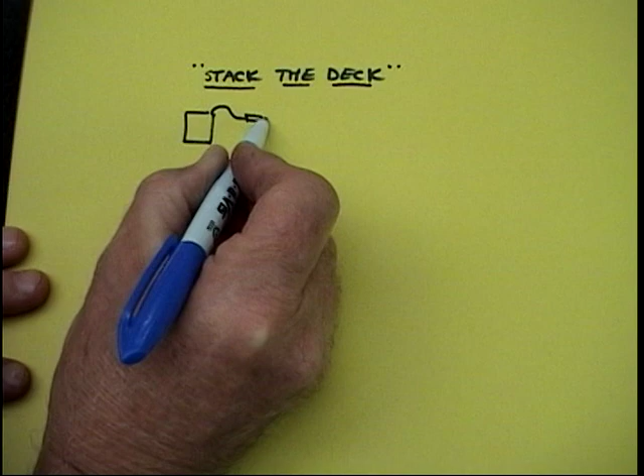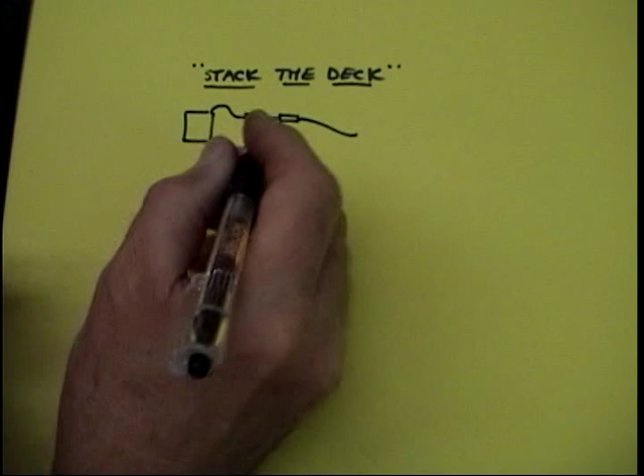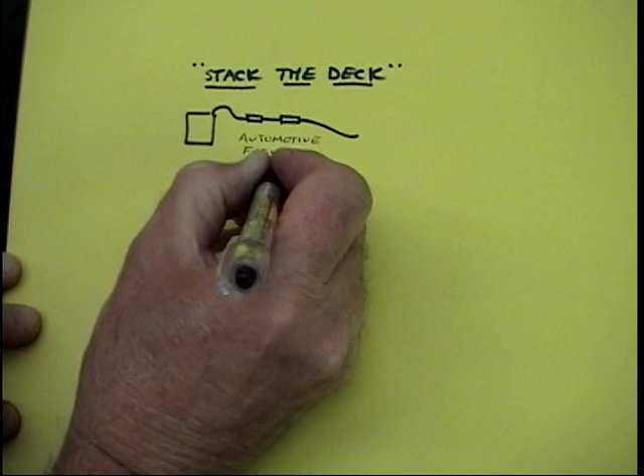Fuel jug. If you notice on my fuel, I have two filters, and they're not the kind of little filters that go in the airplane. They're automotive fuel filters. You could buy these in any car parts store and they're cheap.

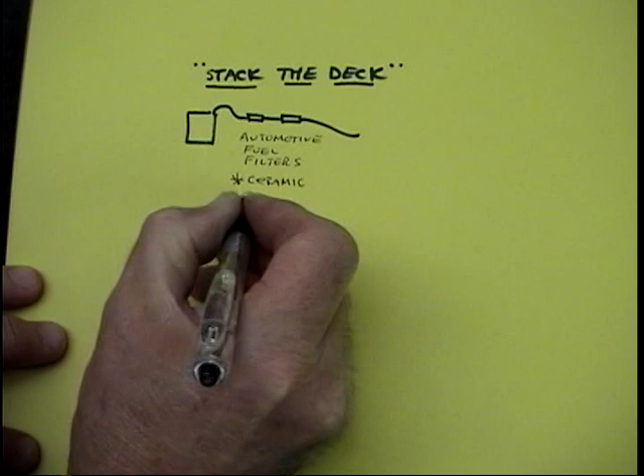The best ones are ceramic. They make them for motorcycles too. Paper ones also work. What these do is filter out a lot of the things that happen to fuel.

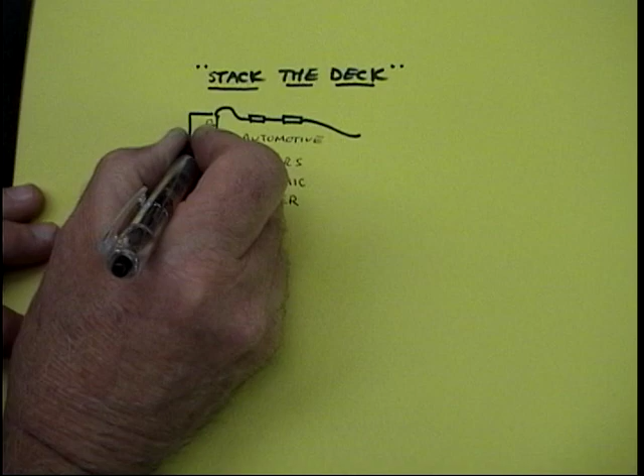When fuel gets a little old, the castor oil tends to congeal. Dirt and dust can get into the fuel, and because fuel is hydrous, it absorbs moisture. A lot of times it'll turn the castor oil into what looks like little white cotton. These filters get it out. So this stacks the deck in your favor before you ever even fly the plane. Having these little filters is a giant saving.

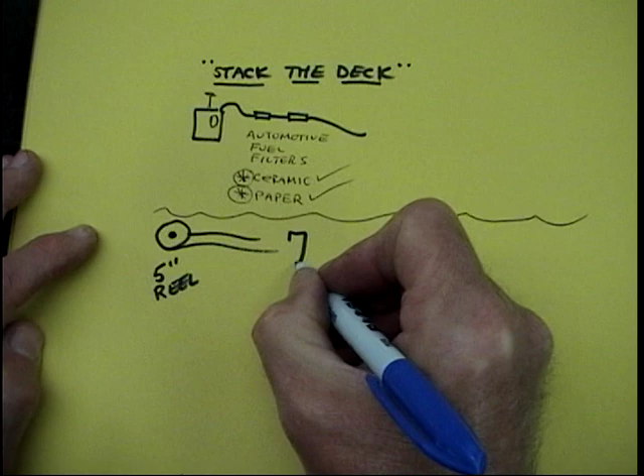Another little tip, worth its weight in gold. Every ship that I have has a line reel, and they're all 5-inch large diameter line reels. I also have a dedicated handle for each model. The handle is always marked with one side up, bright paint, and on the bottom side a safety thong.

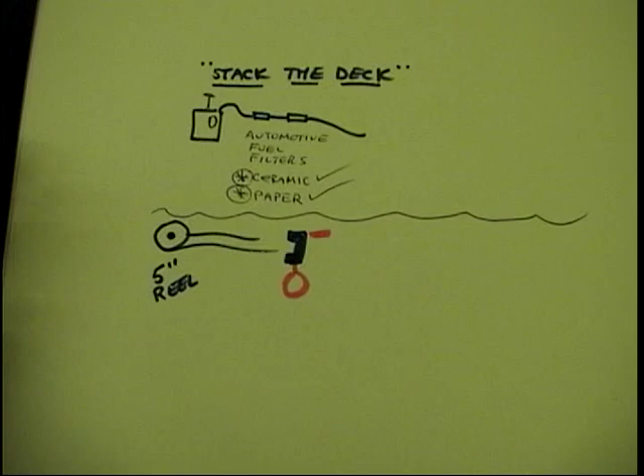You'd think nobody in the world would even think about doing it any other way, but you do have people with one set of lines and one handle for 10 different models. When I get to the point of bench trimming a plane, I want that set: the handle, the clips, the lines, all together. And that goes with that model. I don't mix and match.

There's so much of a chance that when you use little reels to store lines, the small reels that lines come on, you kink the ends, and that's where they usually break. When you have a handle that's going to go on model A, model B, model C, the chance of getting it wrong, picking it up upside down, hooking it up crooked, is astronomically higher than if you had one handle and lines for each model.

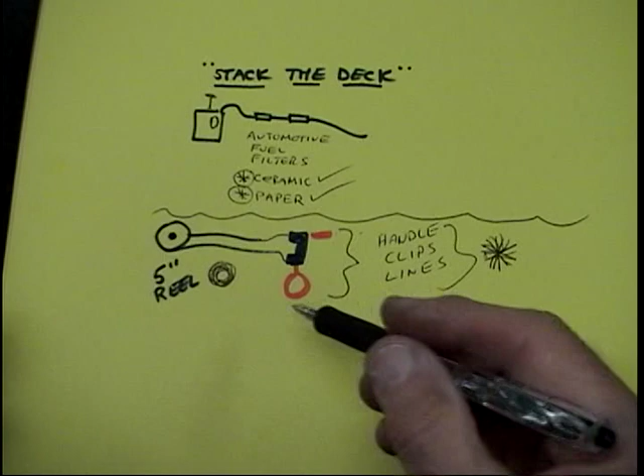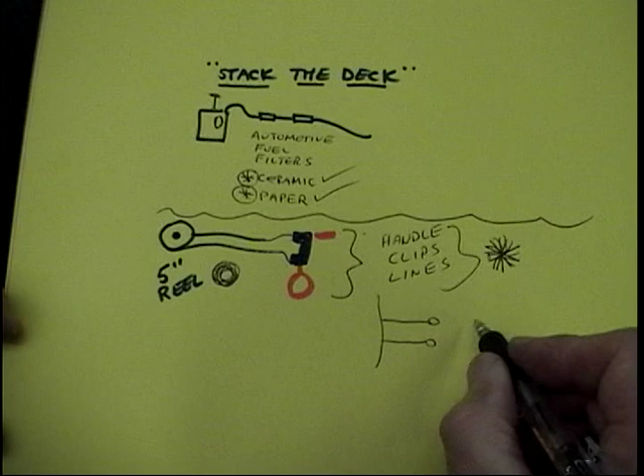And on the side that goes to the plane, if you look at any of my models, here's the lines coming out of the wing, and here's the lines going out to the handle. I'll always identify with a little piece of red wire which goes to which — in the case of some people, they use nail polish or some other identifying way — so they don't get hooked up backwards.

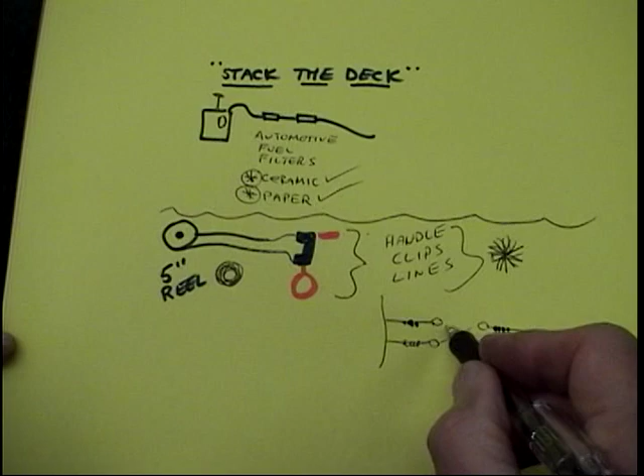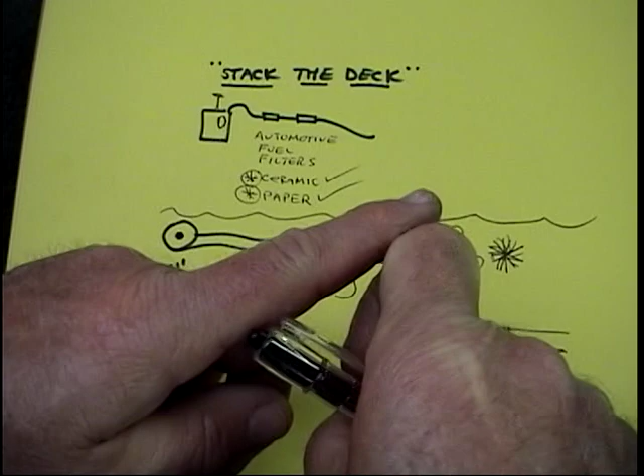Easiest thing in the world: you're flying that brand new model you worked all winter on, everybody's excited, all your friends are there, and what happens? You hook these up backwards, and it's usually a disaster. Or you've stored lines on those little baby reels, and right where they come in and out of the reel, you'll always see a kink. It's just sad when somebody loses a model unnecessarily that way.

Big line reels, the best insurance. A dedicated handle for each model.

Another part of bench trimming is called knurls. A lot of manufacturers, even of the most expensive and best engines made, don't knurl every surface. Here's the motor, and this is part of bench trimming you do at the shop before you fly the model. The back face, where the prop is going to go up against, I would take an engraving tool or a file and roughen it up, make it as rough as possible.

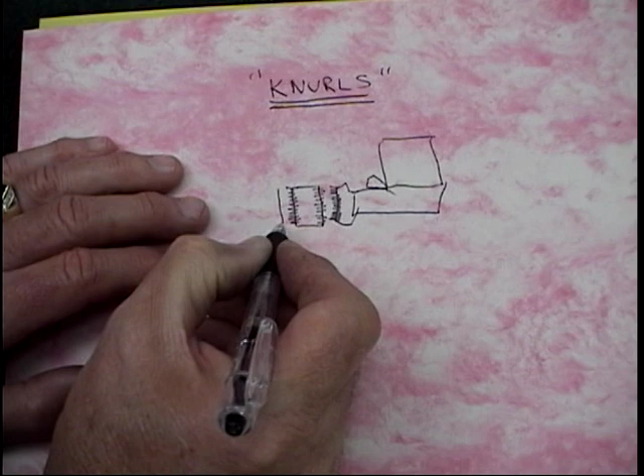The surface of the prop, especially if it's nylon or carbon, I want teeth there. I want it rough — an engraving tool is real good — on both sides. The washer or nose weight that goes up against that, I want knurls on that side too. The side the nut goes on, you don't need knurls. So you usually wind up with a minimum of 4 surfaces.

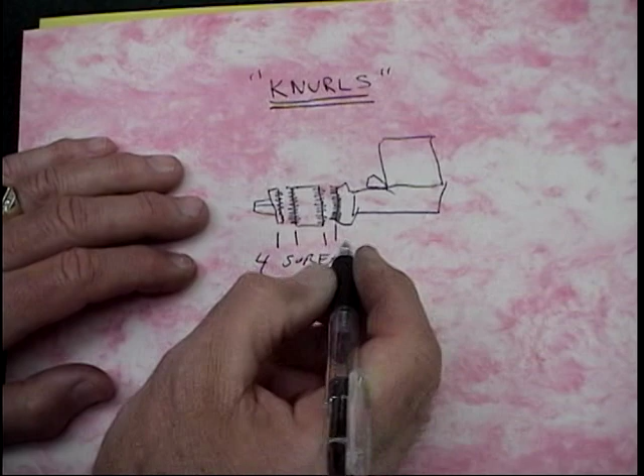In the case of a spinner, you can have 6 or more surfaces. An extension unit, 8 or more. You want those surfaces knurled, rough. If you look at a prop washer, use a file or a Dremel tool to make a sunburst out of it. If you have an engraving tool, just make it as rough as possible, or both.

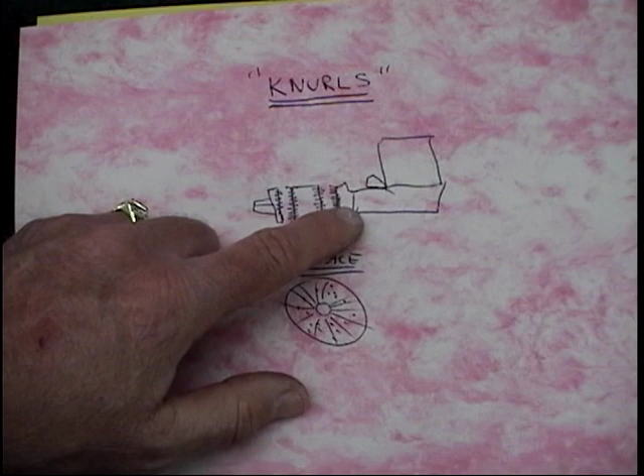Now this isn't real obvious. Well, it's obvious when a prop comes loose. Either it'll flip backward, kick back, loosen the prop and the motor will keep running, in which case it's dangerous — you could lose your eye, your face, your nose, and/or the motor.

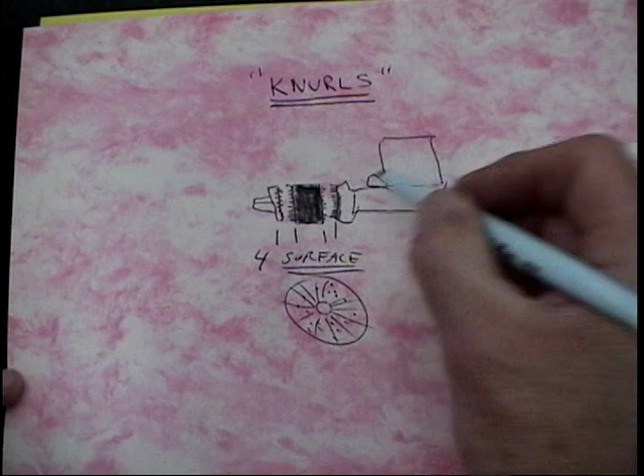Knurl surfaces allow that when you tighten it, these grip, they have teeth, and those surfaces grip together, especially if you're using a nylon or a carbon prop. This is absolutely critical not to have that surface smooth. Knurls are your friend, and they get put in at the shop before you ever fly the model or run the motor. Knurls are cheap insurance that you're not going to have a safety issue, a prop come loose, or just the inconvenience of having to take it all apart and retighten the prop at an inconvenient time.

Now, it may sound funny. If you're a person that has a whole bunch of windy videos, you might have the video from our trip to Texas. Well, on that trip to Texas, we had a very funny thing happen. Funny if you're in the Michelin tire business. We were driving along from Houston to Dallas to go stay with Al Raby, and what happened? One of my tires, boom, blew out.

Now you're thinking, well, what the heck's that got to do with a bench trimming video? Well, it's got a lot to do with it, because what I had done is not checked my tires before the trip and never realized they had 88,000 miles on them. The Michelin tires are warranted for 75,000. So it means I had nobody to blame but myself. Well, I became an even bigger believer in the idea of replacement items.

Now, that's just an example in a car. A windshield wiper - these are replacement items. You don't replace one windshield wiper, you replace both of them. In the case of tires, yeah, well, sometimes you can replace one or two. I wound up buying four tires at about $600, and it basically ate the budget for the whole trip.

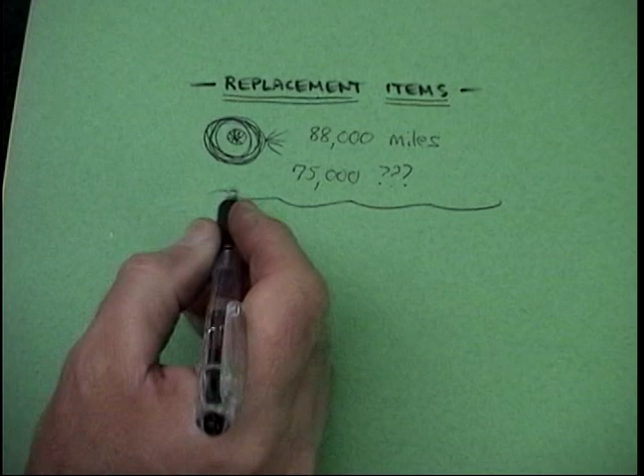But here's the point. Here's how this relates into what we're doing. Knowing when something is going to wear out, you really don't wait for it to break. You replace it before it breaks. Here are some of the things that are very obvious.

The cables that go through most handles - very inexpensive part. The part takes a tremendous stress right at the end. All of the stress goes right into the end of that cable, no matter what kind of system you have, bar or no bar, or the traditional handle. That cable, at the end of every season, or even better, at the beginning of a bench trimming - I'll explain why in a minute - when you bench trim a model, I would cut the cable out, replace with a new cable.

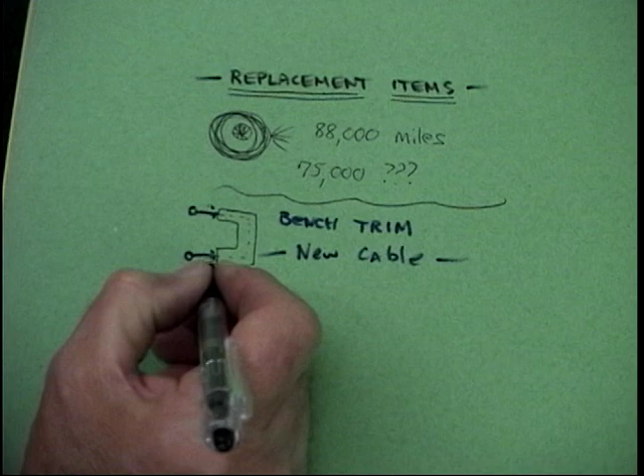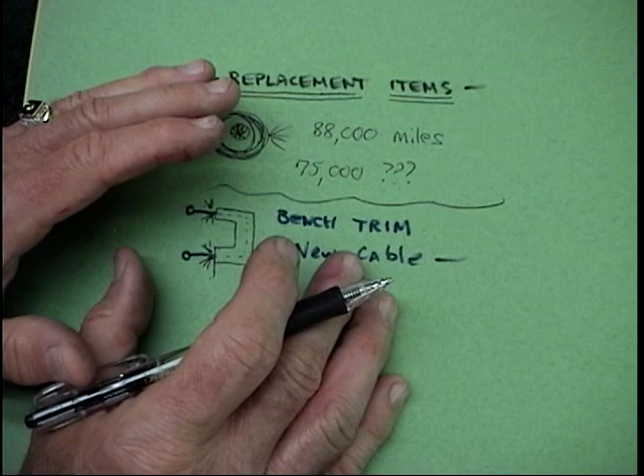I've seen at least 4 or 5 people that I know, highly skilled modelers, lose a plane early into it. Because what happened is they set this cable, and what happens, it wears right at that point where it exits. And now if you're flying X amount of gallons and you're putting a lot of wear and tear on it and you don't replace it, it's like that tire in Texas.

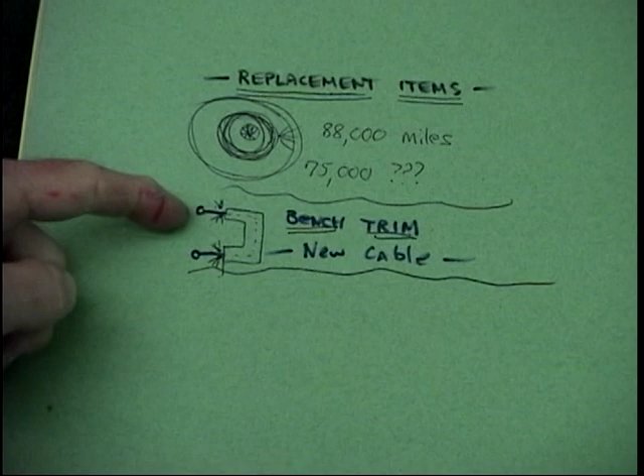It picks a very inconvenient time and place to break. A new handle cable is such cheap insurance, and the time to do it is when you're bench trimming the model, because then you don't forget. You don't get to the field and say, oh, I don't want to do that, I want to fly today. Do that right on the bench. A new cable each time you bring out a new model. Good, cheap insurance.

And these are all little things, but the combination of all these little things is you have a problem-free first flight on a plane, and or first day, and or first month, year, or forever. It's problem-free.

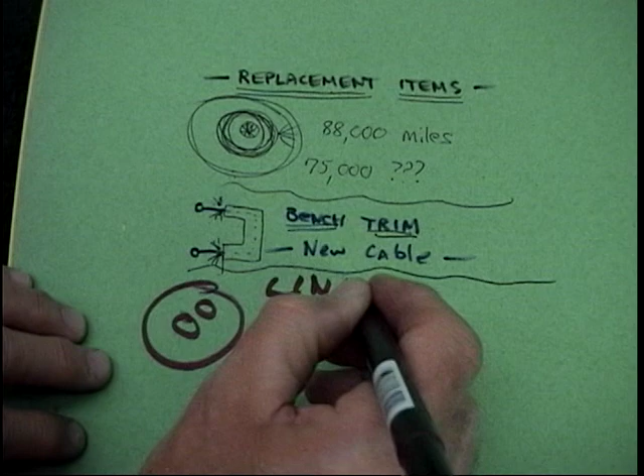Another thing - lines. How many, oh my God, it's not even fair to start thinking about it - how many people have refused to purchase a new set of lines? I got a new model, I'll use last year's lines. Oh yeah, somebody stepped on them at the end of last year and I forgot to check that they're kinked or they're frayed or they're broken.

Now this is something I know about, and I know really well, because last year I lost the Typhoon, one of my top 5 planes. I lost it because a line failed. And I realized it was my own fault.

A new plane, you're bench trimming it - what a great time to get a new set of lines. What a great time to get a new cable and a handle. What a great time to replace things before they break. Think of them - lines and handles are replacement items. And you replace them before they fail in service.

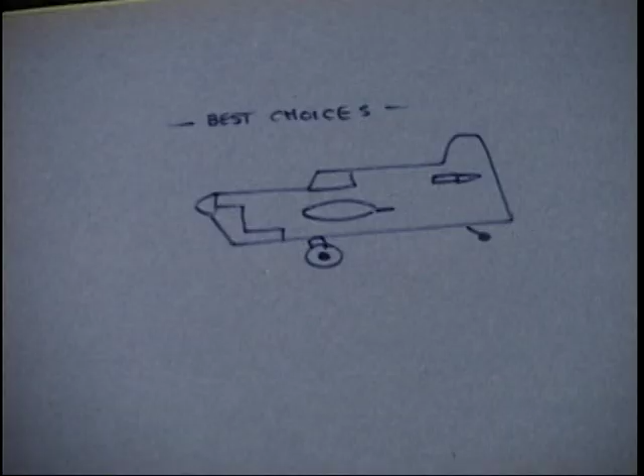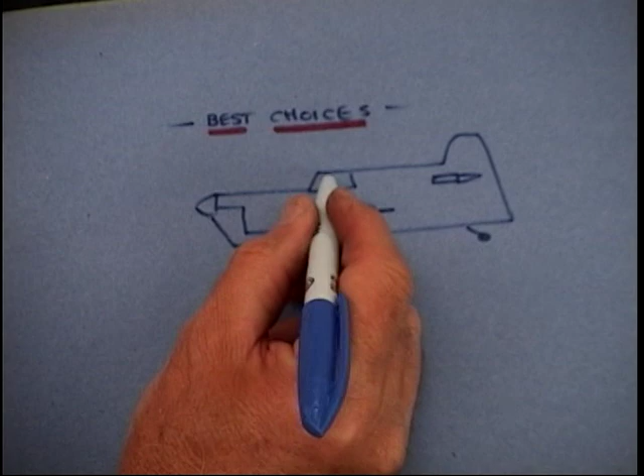So let's make up what I call some best choices. Best choices usually are - you usually have a scenario that you have to deal with. Let's make a couple of scenarios up that'll be easy. We've checked our center of gravity and we realize, uh-oh, this model is really nose heavy. That's where it should balance, and it balances way further forward than that.

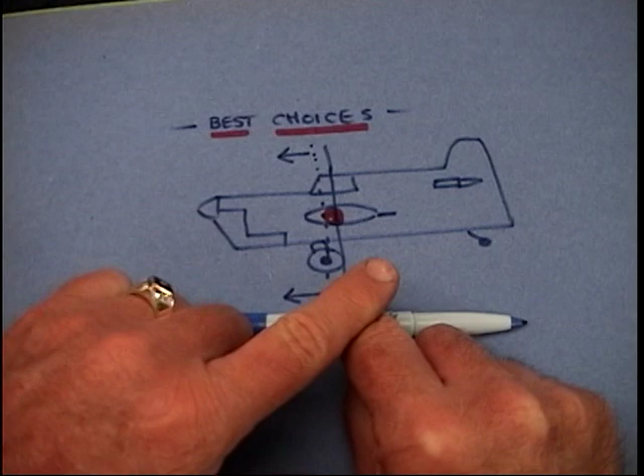Now we know some of the ways we can get this model into its correct balance point. There are two possibilities when you have a seesaw: if this side falls down, you can put more weight on the other side, or you can take some weight off the heavy side.

And to be honest, you could also change the fulcrum point, but we can't really do that right now. Let's make up a scenario: the model is really nose heavy. You built this beautiful model with a beautiful finish, but it's nose heavy. You go to bench trim it and you're disheartened because you have to get some weight out.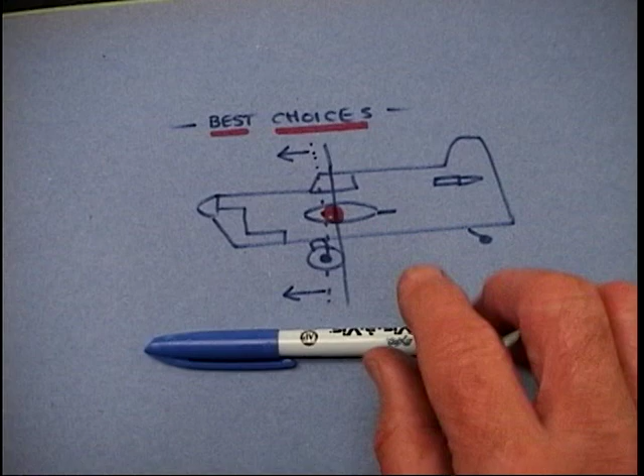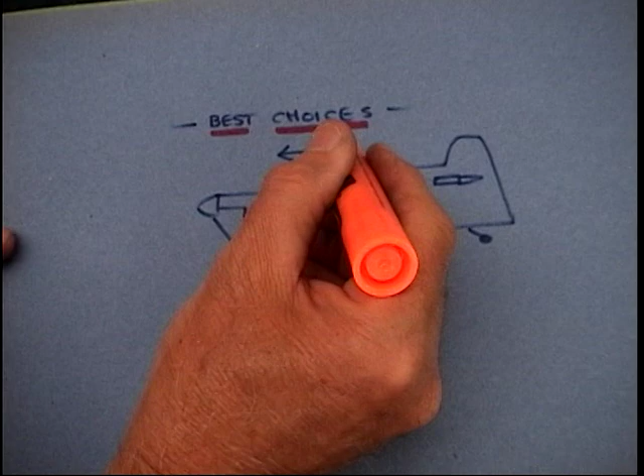What are the possibilities, what are the things we can do? You always start, when trying to change the center of gravity, as far from the fulcrum or pivot point as possible. In this case, the spinner is the single item that's easiest to change, and you could even do it right at the field.

A lot of times if you weigh up a bunch of manufacturers' spinners, you can find variations of an ounce and a half between different brands. Let's pretend you've now got the lightest spinner you can put on the plane, and it's still nose heavy.

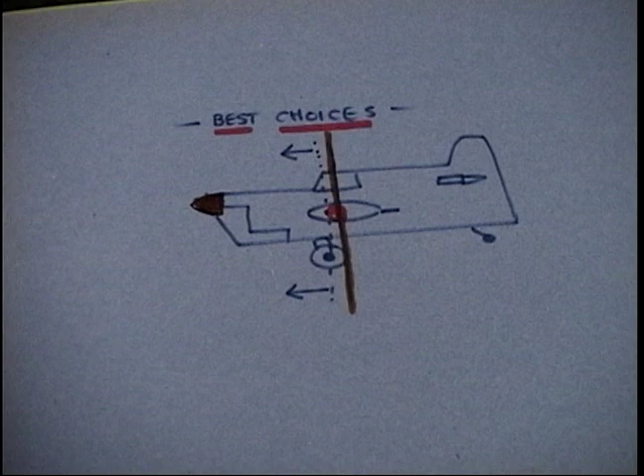As we work our way back, what are some other things? Well, of course, the prop is another choice. You could put a lighter prop on, but you still need the prop to fly the plane.

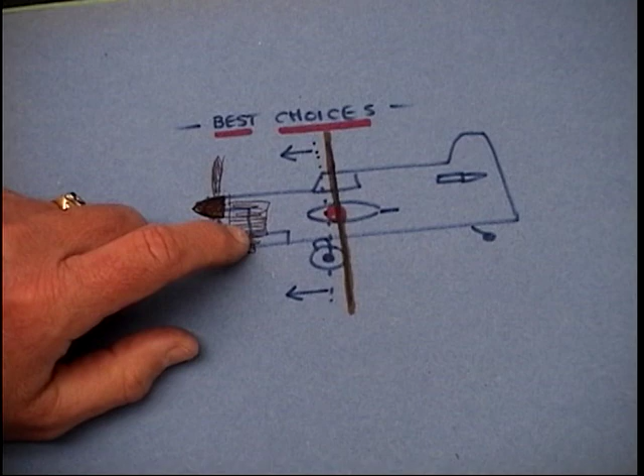The motor: in a lot of cases, different brands of motors weigh dramatically different. As an example, a Fox or a Brodak 40 is a lot lighter than some of the more modern OS Max motors, which can be a bit heavier, or some that are really heavy. So changing the motor is another possibility.

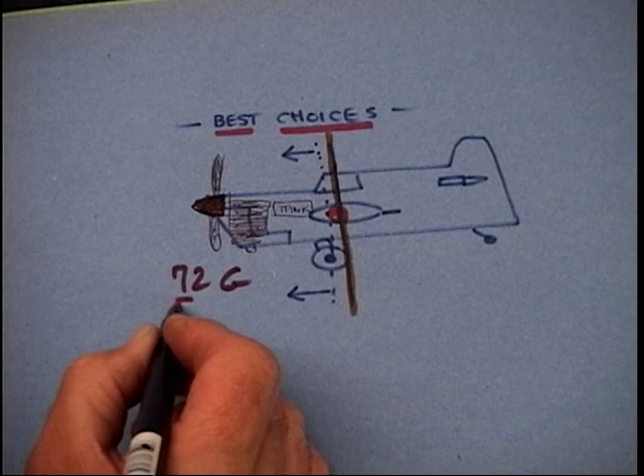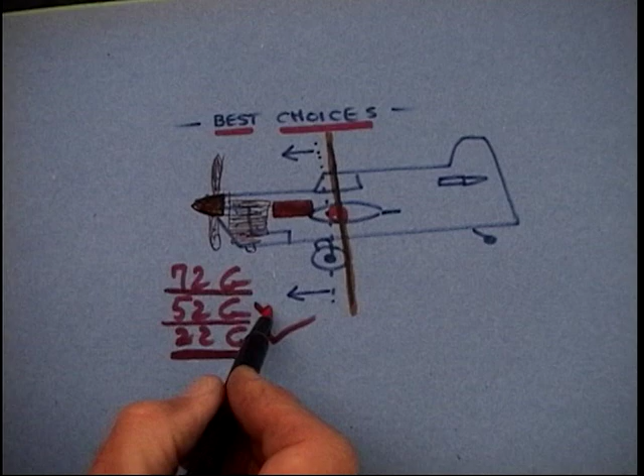The lightest tanks possible are carbon fiber, which are expensive and may not be appropriate for what you're flying. But there are mid-range tanks from many manufacturers, the plastic ones, Brodak's tanks, and then custom-made, relatively heavy-duty tanks.

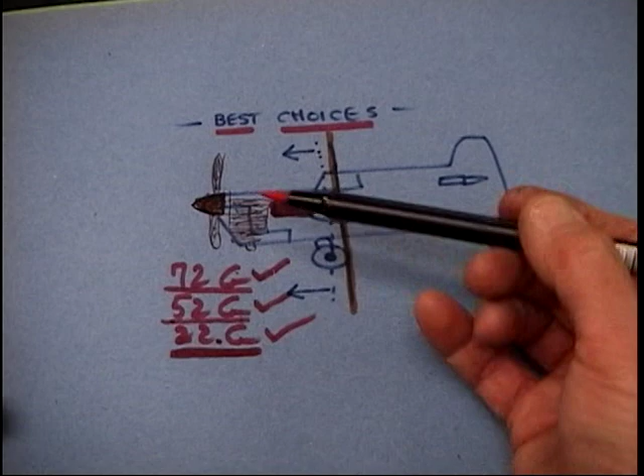When balancing the model, if you change from a 72-gram tank to a 22-gram tank, you're not only taking two ounces off the model, you're taking it off in the front, getting that CG back to where it's more favorable, more in your favor.

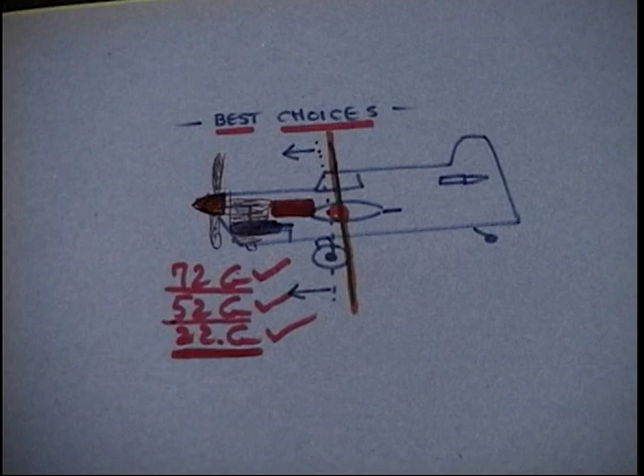On some ships with barrel mufflers, some side-exhaust engines have a big heavy muffler, typically three, maybe even four ounces. A lot of times you can use a tongue muffler instead, and vary the weight of the muffler that way.

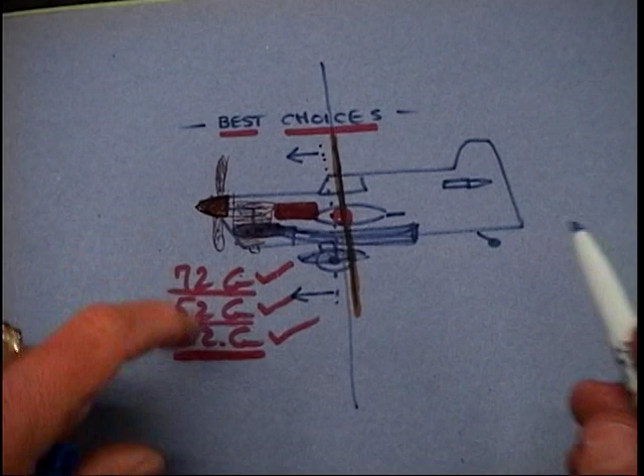In the case of a tuned pipe model, you can buy the lighter of the brands of pipes, and vary both the vertical and horizontal CG with the weight of that pipe. These are all things, and typically wheel pants add into this equation too. Basically everything except the back end of the tuned pipe is in front of the CG, and it's also going to affect the vertical CG.

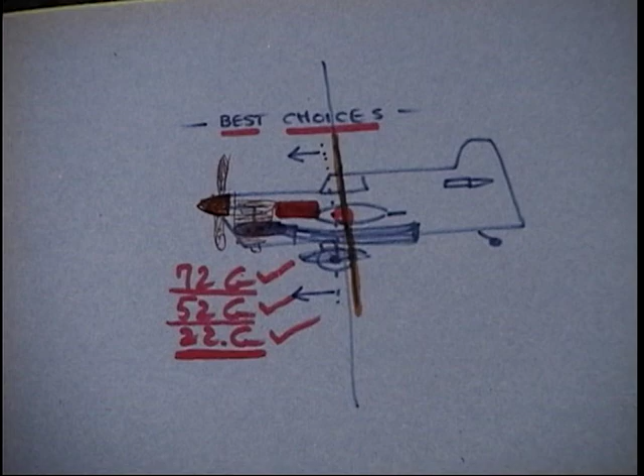So this is something to consider when you know a model's nose heavy. Before you even fly it, you'd like to get it back to where the designer put it on the plans, and if you can't find that, to the high point of the wing. That would always be a better choice, and in this case, this is the simplest thing of all.

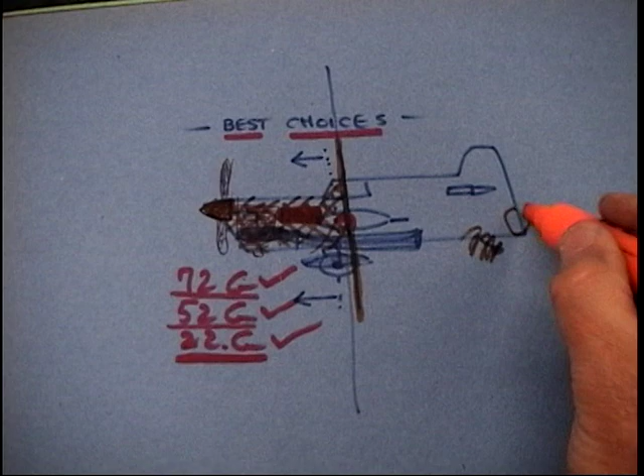The choices are to always take weight off the heavy side. Now, what a lot of people do, and I used to do it too, is say the model doesn't balance, so I'll just wrap solder all over the tail wheel, glue lead here, put clay on the rudder. Well, adding weight is not the best choice.

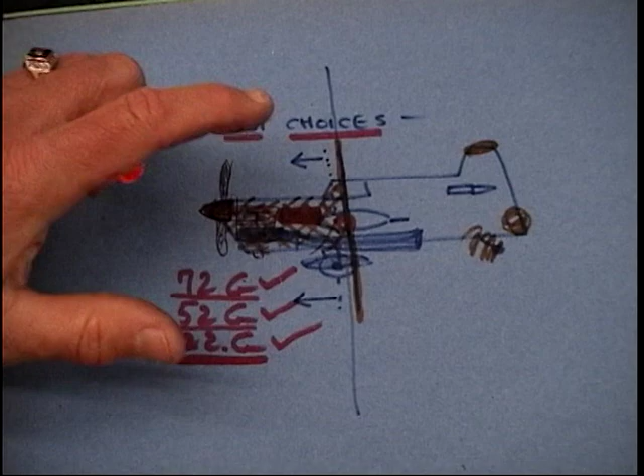The best choice is always to take weight off the heavy side, starting as far forward as possible and working your way back to the vertical CG. Then, if everything else fails, go behind the CG and add a little solder or clay or some material. But always, the best choice is to take material off the heavy side. It's always a better choice in my opinion, and that's the only choice anybody should exercise.